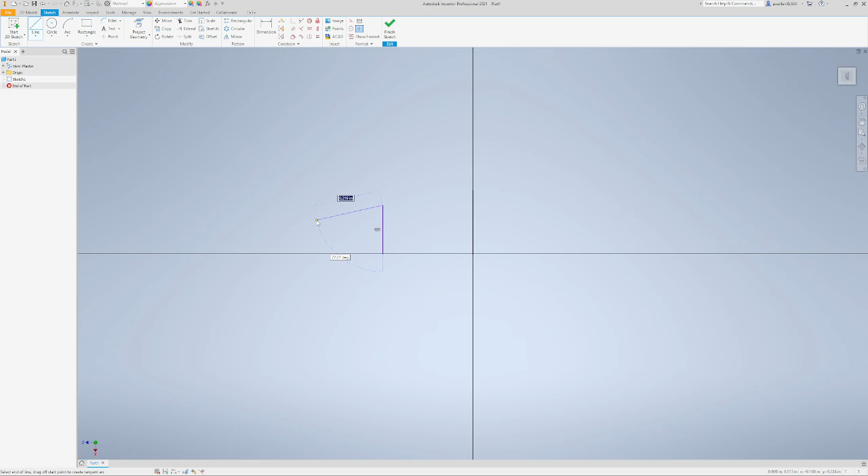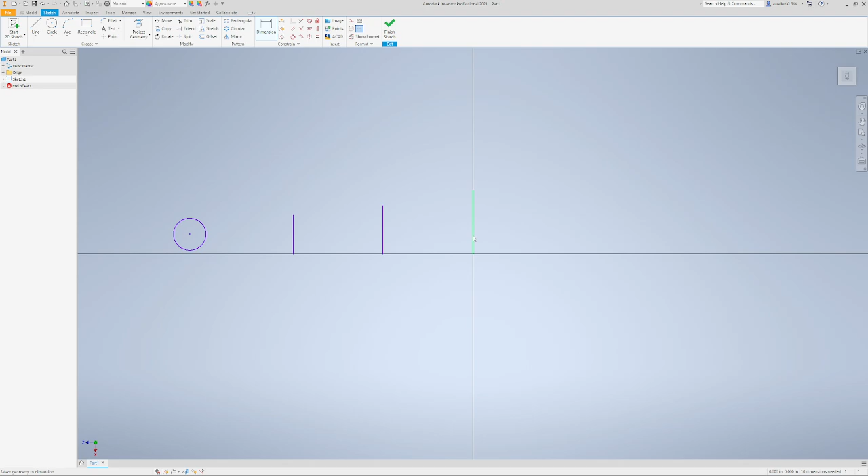And a circle. Each of these will need a dimension for how long it is, as well as our circle. And then they're also going to need a dimension from that center point. So I'm just going to lay all of these out at first, and then I'll go back and put in the values that I want for them.

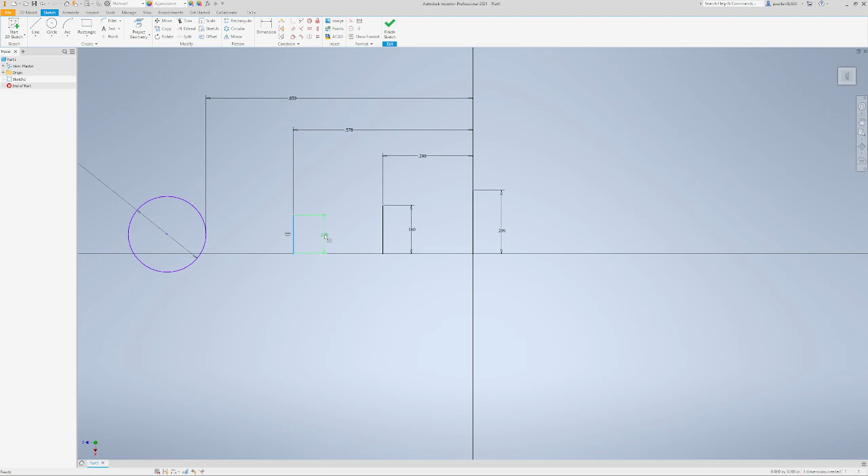So my whole wheel, since we are going to revolve it, is 0.25 thick. These lines are both half of our wheel, so it's going to be 0.125. This one, yeah, we can just use 0.125. We could also use our equal constraint there. And then this one is our full length, so this is going to be 0.25 here as well.

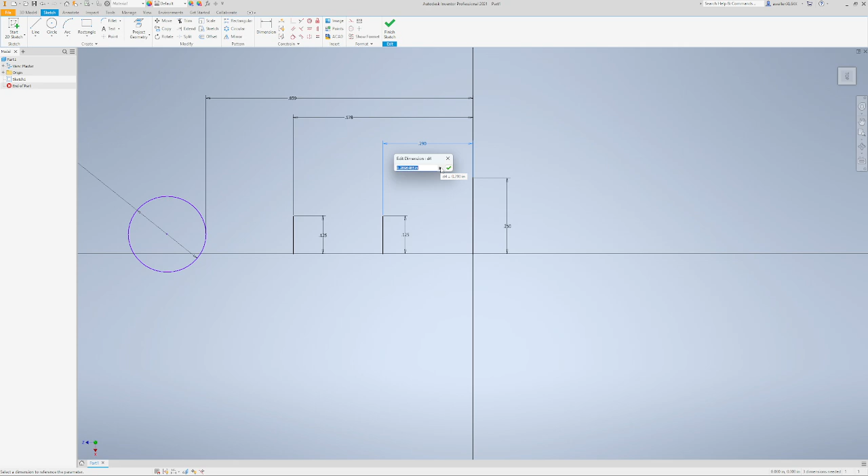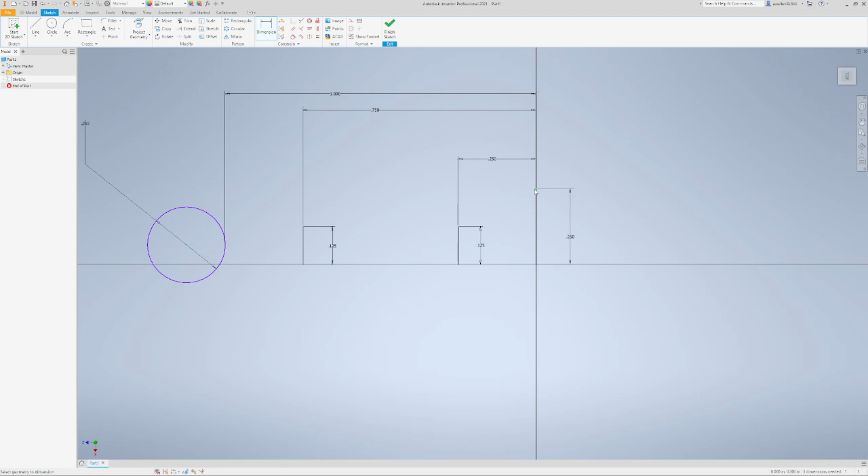Then the next thing I'm going to do is dimension how far out they go. So this one's 0.25. This one is 0.75. And this one, the center is 1 inch away. The other thing I need to do is set the dimension from here to the top of this line. That's going to be 0.125. Then I can set my dimensions between here.

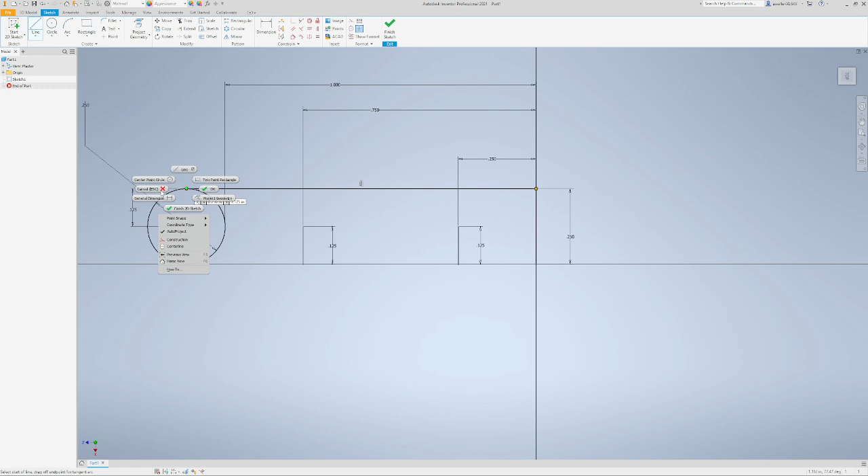Well, these should be stuck on the bottom here, so they should be fine, but we'll see if that causes problems later. Then all I do is hook these up with some more lines. You want to start the line here and make sure that it's tangent down there. Then start tangent down here with this circle and just connect up your lines.

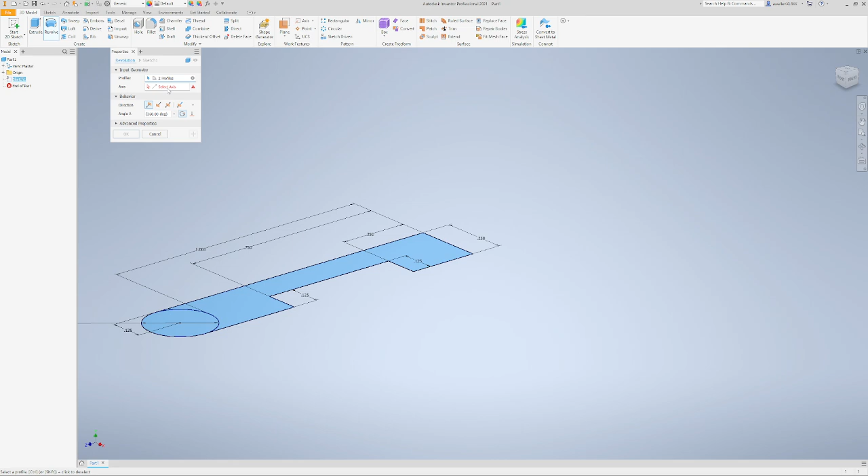And there we go, we have the beginnings of our wheel. What I will do then is revolve, and I'll select the 2 profiles that I want to revolve. Then I'll select the axis that I want to revolve them around. And there we go, we have the basics of our wheel.

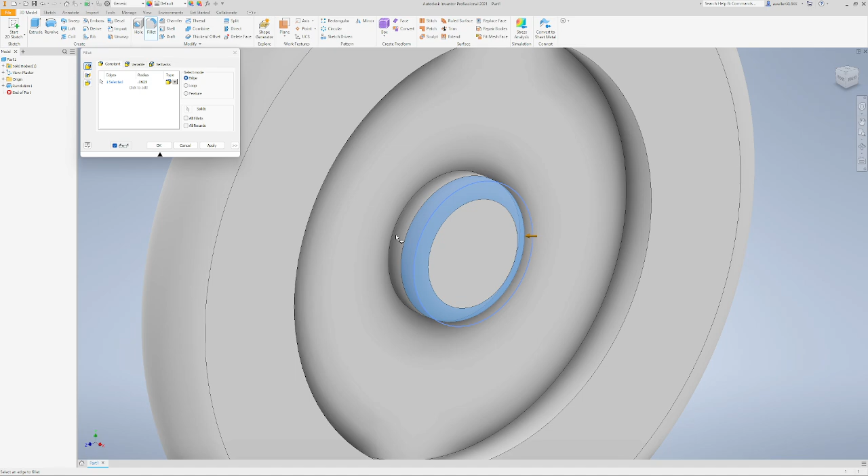The next thing I would do to get those nice smooth edges is a fillet. I would change the radius of my fillet to the value that it gave me, which is 0.0625. And then I select all of the edges that need that dimension. And there we go, so now we have the basics of our wheel.

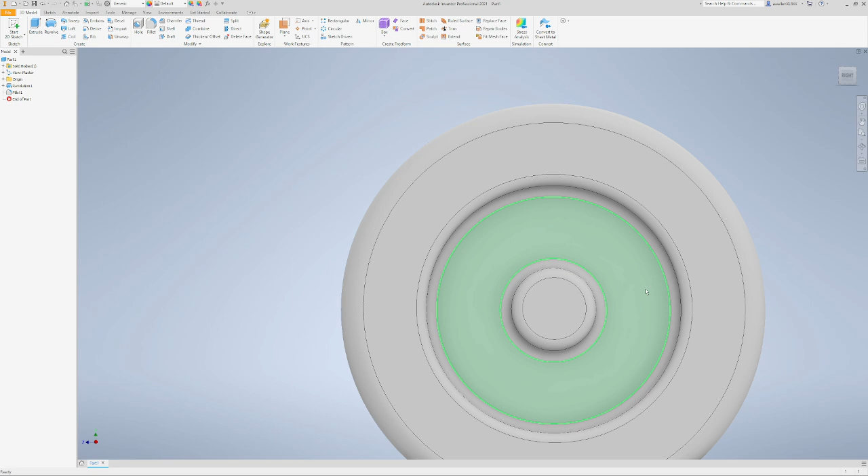The other thing we could do, and I'm not going to make this whole part, so you guys will have to put in a circle here and start a sketch on here and put in the little part that comes out here. But I will go over how to put those holes in that pattern on the back. So I'm just going to start a sketch on the back, and I'm going to do this with 2 circles and 3 lines.

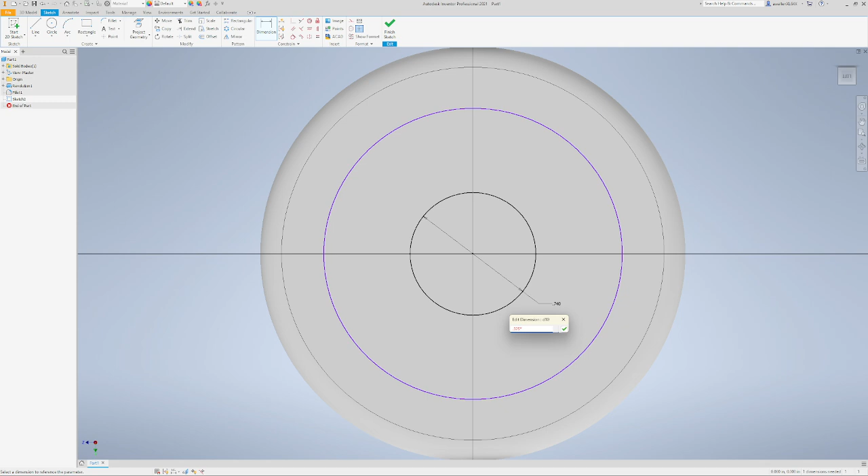So I have 2 circles, and I'll dimension these. This first circle, I'm told, has a radius of 0.375, so I'm just going to do 0.375 times 2. And this one has a radius of 0.625, so for my diameter, again, I just multiply that by 2.

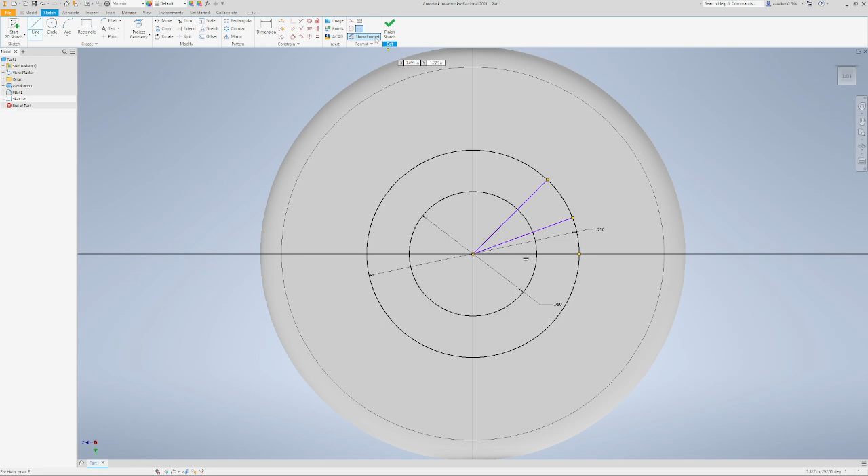Then I'm going to do 3 lines. One is just this horizontal line, and I don't worry about how long they are just because I know they're the radius of that outer dimension. So then the dimensions that I will worry about are these angles, and I'm told this first angle is 15 and this second one is 30.

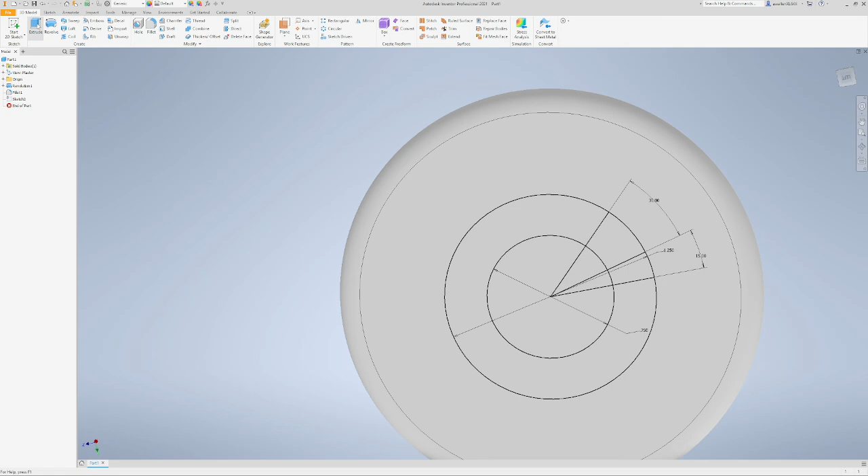There we go. Now that I've got one of the shapes that I like, I'll extrude it out, cut that hole, and then what I can do is a circular pattern, and I want this to repeat.

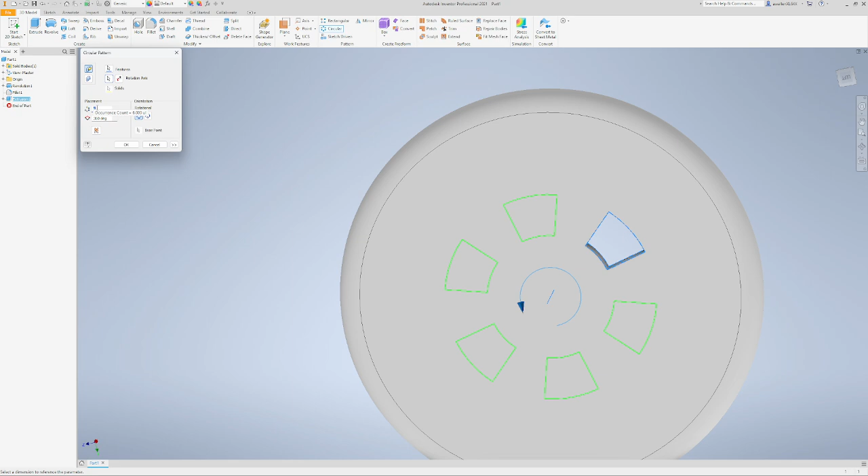Then I'll select what it's going to rotate about. So the first thing I do is in features, I select what I want to rotate, then I select what I want it to rotate about. And I'm just going to choose one of these circles here, so it's going to rotate around that circle. I want it to create 6 patterns in 360 degrees. I hit OK, and there you go.

So from there, I trust that you guys can finish the wheel. That's how far we're going to go. Hopefully this helps, and have a great day.